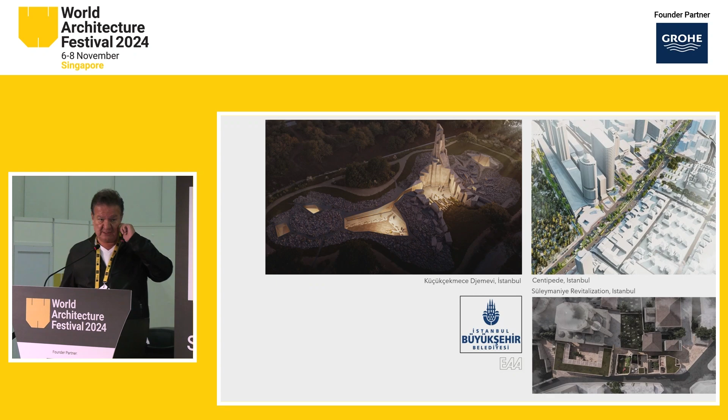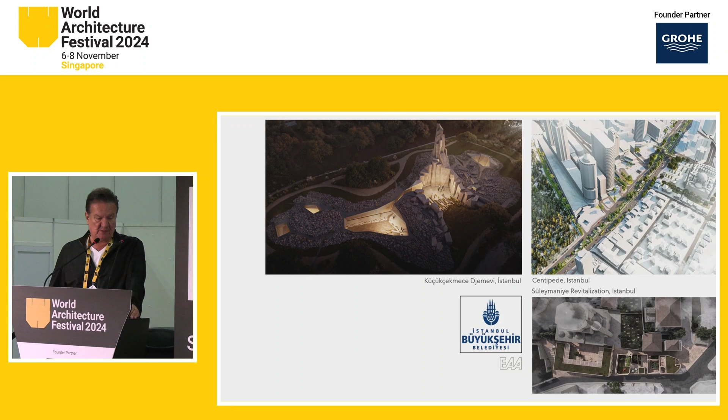This is one of several projects we are working on with the Istanbul municipality, the greater municipality. Even though these projects don't contribute much financially to the office, I personally give them a different level of priority, because the current mayor of Istanbul places great importance on art and architecture, in a way we're not quite accustomed to.

On the other hand, as an opposition leader, he's working on significant urban projects despite all the problems and obstacles from the central government as well. That's why I believe he should be supported without hesitation.

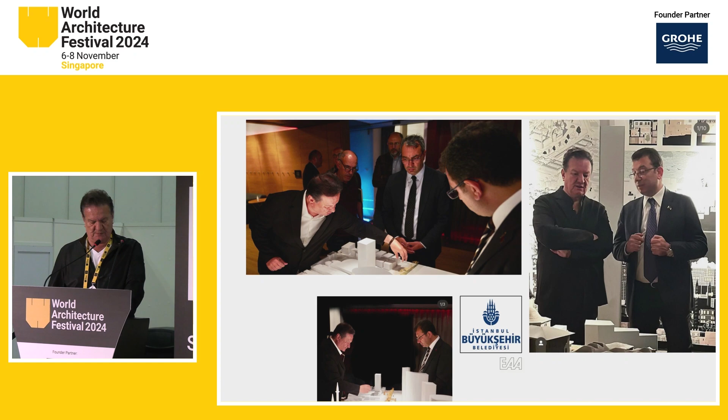When the municipality brought this project to us, the first thing that came to my mind was the Sancaklar Mosque that we designed in Istanbul many years ago, more than 10 years ago. It's for Sunni Islam, not for Alevi. Sunnis are much more in power at the moment, all over the country.

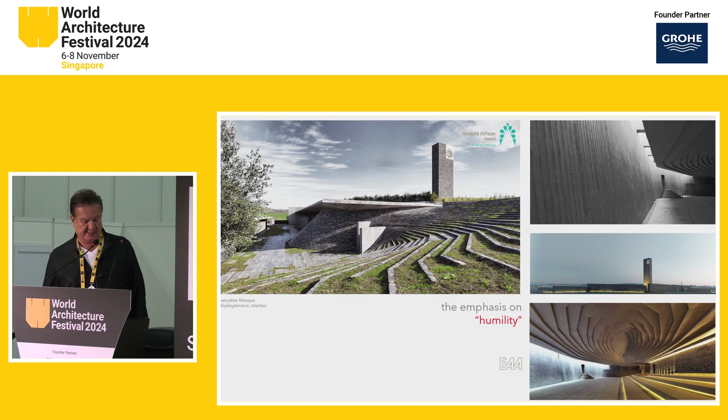I still remember the heated debates we had as the design team during the design process about the crisis in the Islamic world, where the core principles of Islam and its philosophy were somehow being ignored, and how this was affecting architecture in the whole region.

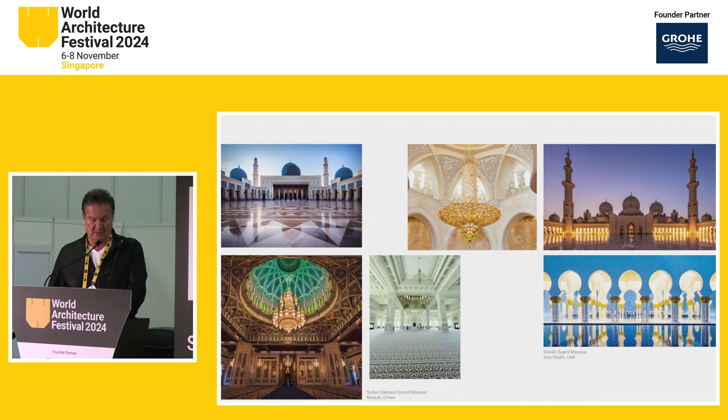We looked at some examples, including Sheikh Zayed Mosque in Abu Dhabi, which is much far away from the idea of humility, a key principle in Islamic philosophy. Or another mosque in Oman, Sultan Qaboos Mosque, where investors or people are somehow proud of millions of dollars spent there, or the largest single piece carpet, or some kind of bombastic chandeliers.

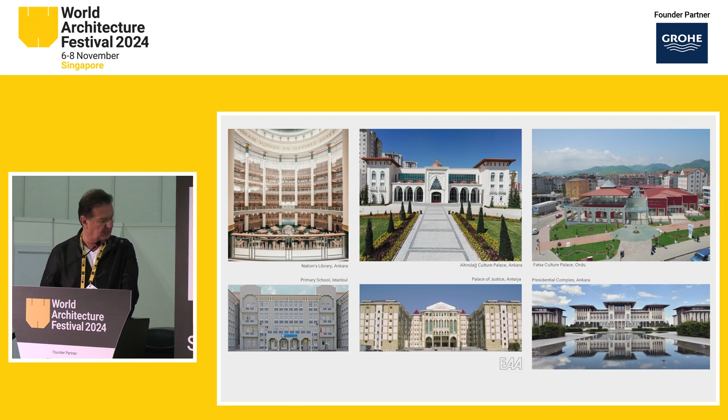I can say the same is valid for Turkey. Over the last 20 years, with the influence of this government, there have been major negative changes in the field of architecture and urbanism all over the country. Lavish and tastelessly designed buildings have spread everywhere, as you can see from the screen. For example, this is the newest landmark project of Istanbul.

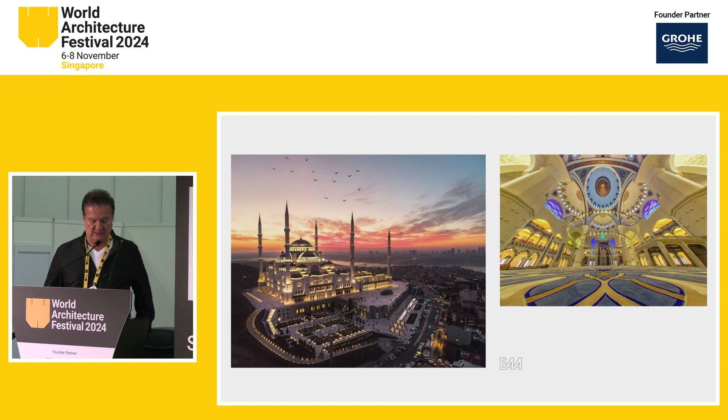In this context, Sunni Islam has become a very dominant force in society day by day. It was kind of inside the politics of this government, and humility or humbleness were degraded, especially in this community, not just in the architectural field but also socially, with the nouveau riche ruling class influence spreading everywhere in the country.

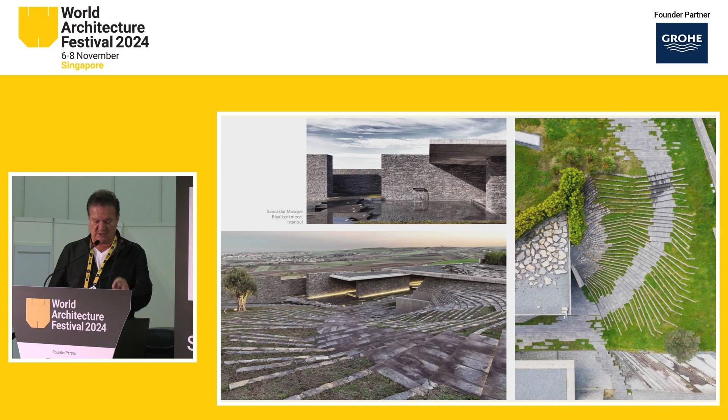This is exactly why the main focus of the Sancaklar Mosque design many years ago was the concept of humility, an approach that blends with its surroundings. But this time, in the case of Cemevi, it needed to be approached in a different way, from a completely different sociological context.

Alevism is one of the sects in Islam, and this complex is going to be a place of worship for the Alevi minority, who have been somehow socially and sociologically oppressed, especially in recent time. Cemevi plays a vital role in their spiritual practices, in their normal life, daily life, safeguarding them for future generations.

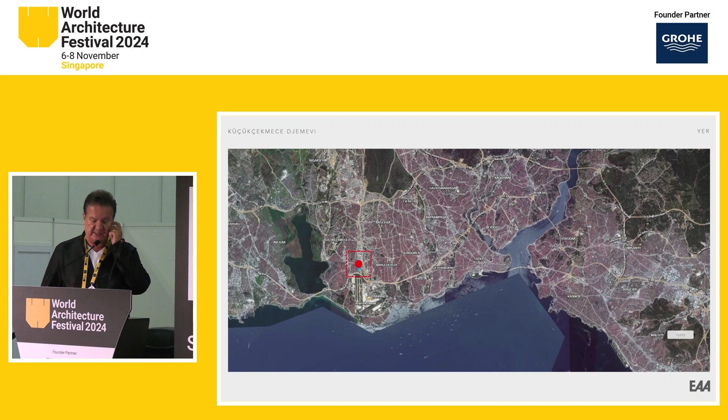The land that the municipality allocated for this building is located at the southern part of Istanbul, very near to the old international airport, so still quite well-known, busy and crowded area. Nearly 10,000 square meters of land is being used as a parking lot for the nearby wedding hall located to the west of the site. You can see it now.

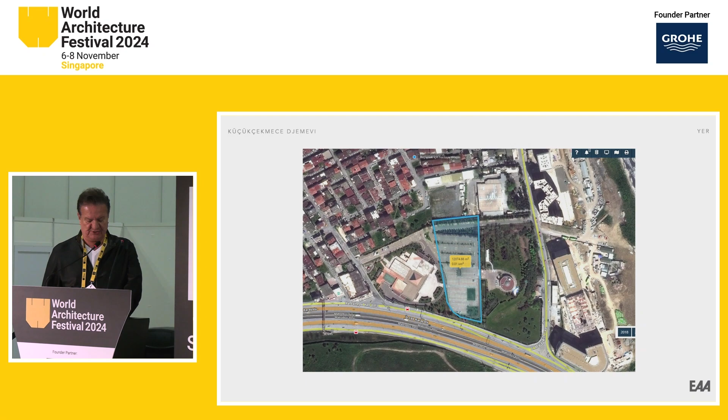To the east, there's a green area that is currently used as a small police station, not open to the public. But from the very beginning of the design process, we always saw it as an important potential for this project. To the north, a highly dense residential and office area is located, and to the south, there's a very busy ring road.

During our closer observations of the land, we saw that the function of parking only comes into play occasionally. Most of the time it's used by local residents, especially in the afternoons when the wedding hall's activities slow down. People would gather there to walk or sit under very few trees for some shade and conversation. This gave us a different inspiration for the space.

This is the land. When we looked at the dense housing and new offices around the area, we realized there was no public space at all. The land and the adjacent police station area, when combined, form an area of approximately 35,000 square meters.

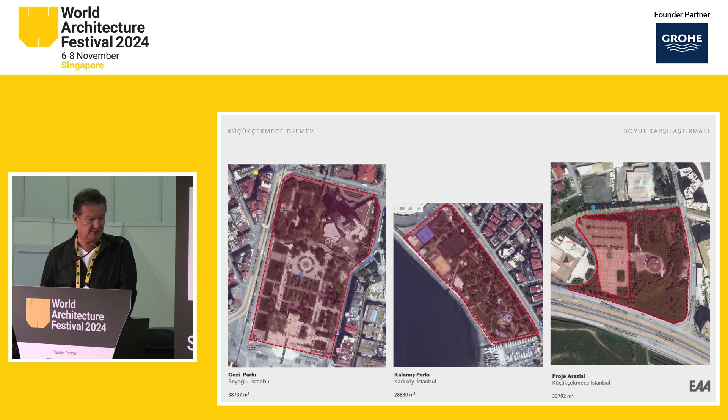This is actually very close to the size of some well-known and heavily used parks located in different areas in town. On the other hand, this area is easily accessible from both the ring road and other nearby roads.

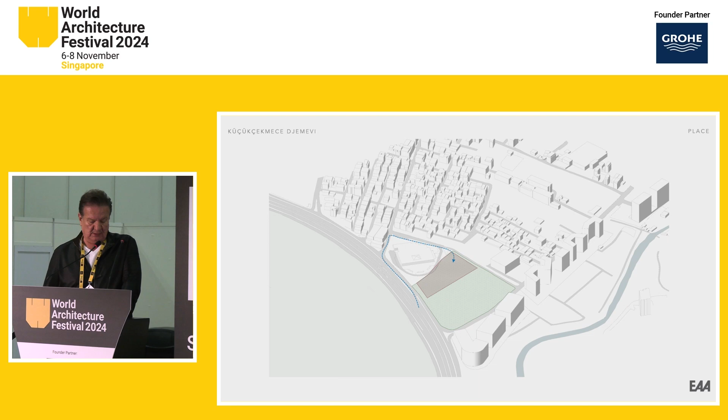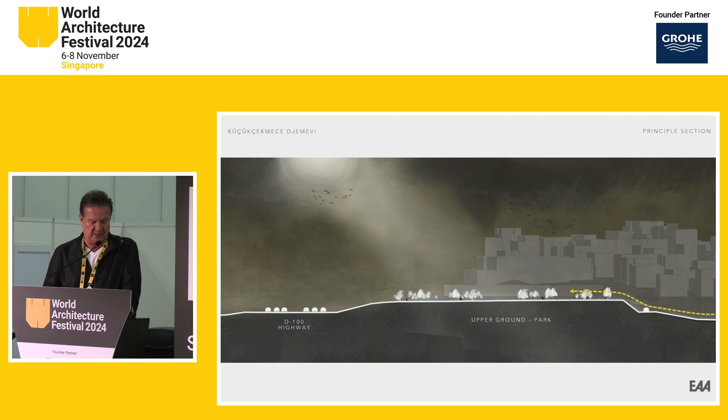In the section diagram, we can see that the site is somehow a kind of hill for the moment, elevated above the two roads, being used as a parking lot. However, it has the potential to be transformed into a very well-designed park, which would be a great asset for this area, easily accessible for all the locals.

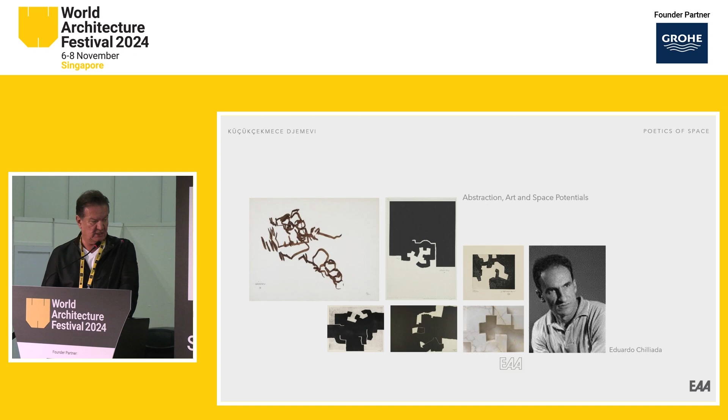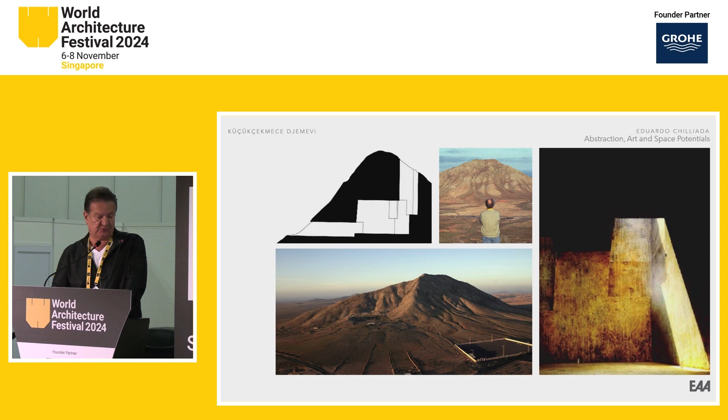While we were thinking about these ideas, we were envisioning Eduardo Chillida's work, where he brilliantly addresses the issues of art, space, abstraction, and soul. He mentions that with its abstract existence, the space he created in Mount Tindaya is a kind of statue of tolerance for people of all colors and races, and inside, no one is different from another. That was a big inspiration for us.

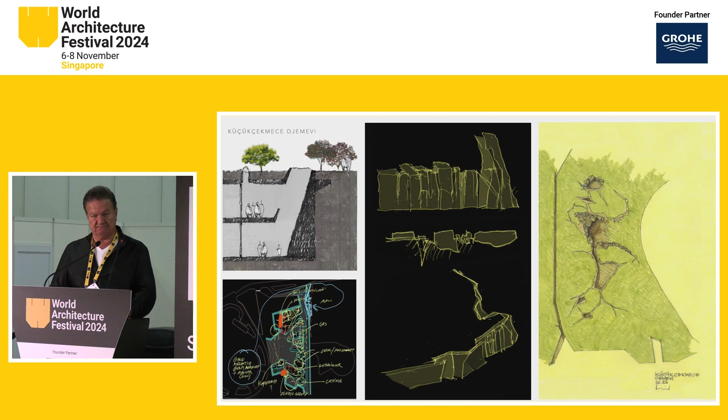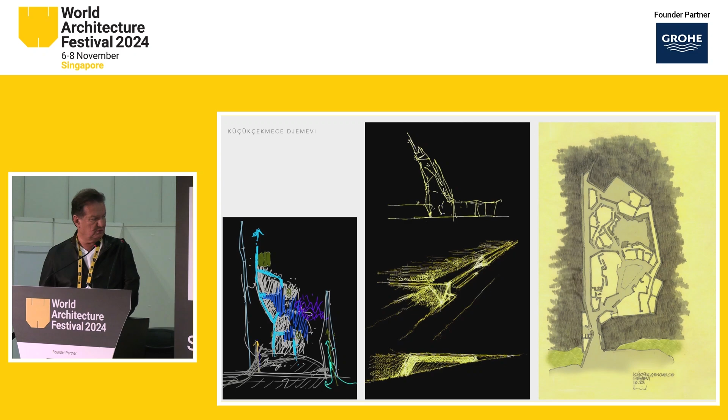These are some of our first sketches. The idea of breaking away from the essence of Islam was not an option at all. However, I had this feeling that a sense of monumentality, together with dignity and calm, needed to be present in this place of worship. At first glance, these might seem like conflicting terms and ideas, but as the design team, we wondered if these elements could actually complement each other in this specific project.

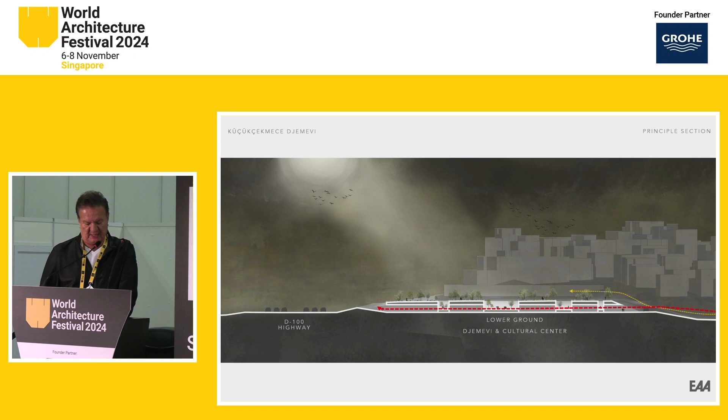In addition to the idea of transforming the upper ground into a public park, we decided to place Djemevi functions under it, at a level where they can be accessed directly from the dense residential area, and organize them around several courtyards. Each one will serve a different function and reflect various rituals and activities of worship and daily life.

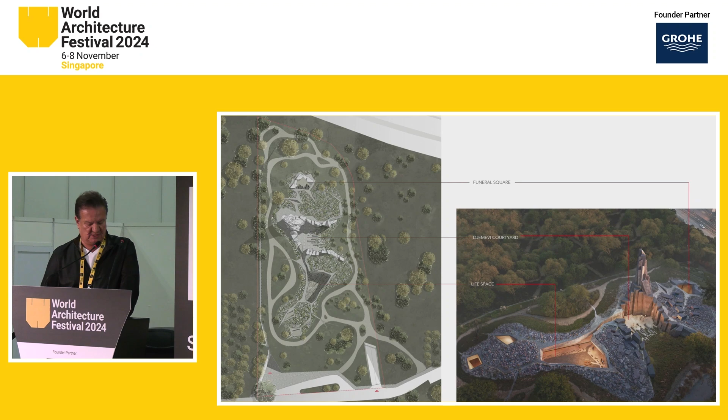This image reflects the connection between the courtyards, the park, and the main room, the main Djemevi courtyard. A night view.

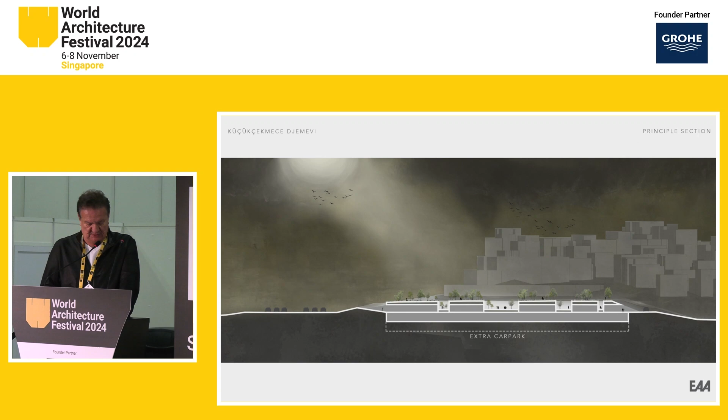Some car park spaces, one or two floors, together with the service areas, will be positioned under the main room. These are the plans of the ground floor and the basement level.

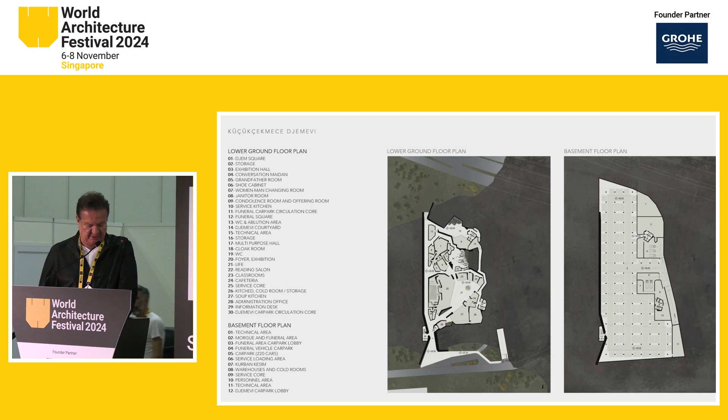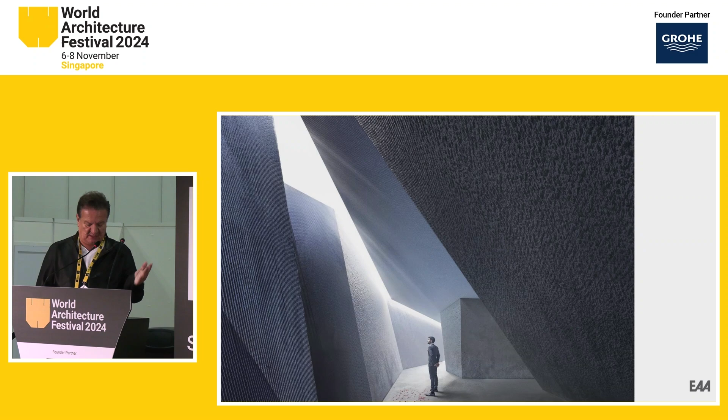You see the fluidity of the arrangement, with the semi-open pedestrian alley connecting all the functions and somehow getting sunlight through a slit. And you see the main section from the main Djem square and connected courtyard.

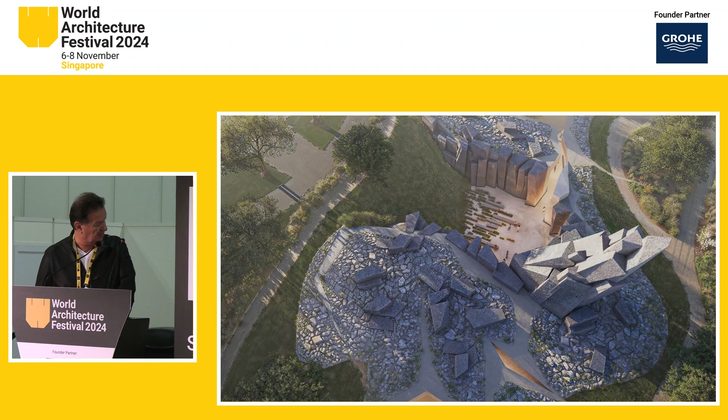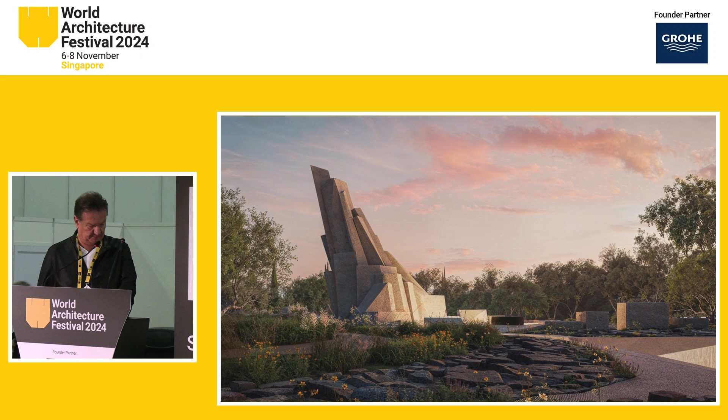The cemevi, the worship area, the main worship area, from inside and outside. This one is from the park level. And the entrance of the semi-open pedestrian alley. One of the courtyards, an element that we somehow interpreted by learning from tradition.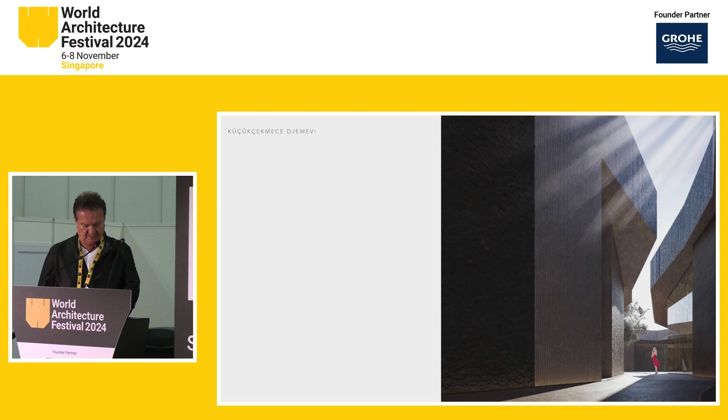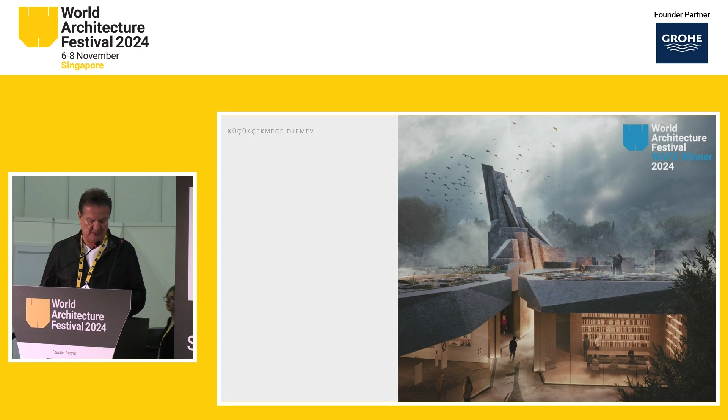I'm very happy to design this kind of building for a community that has been somehow wronged and, let's say, marginalized for years and years, for hundreds of years in the country. This was incredibly exciting for us. Thank you.

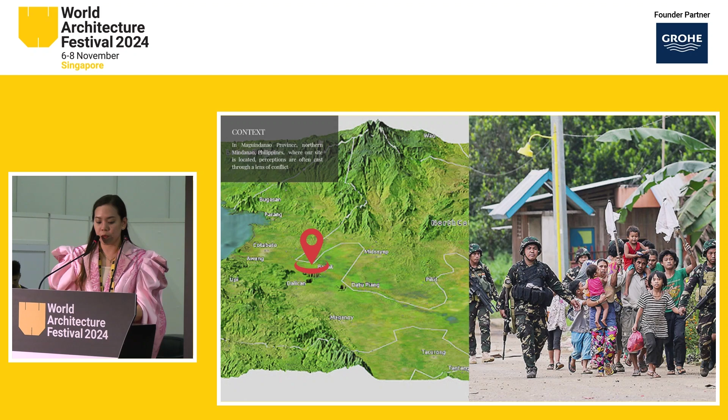This site has a perception that is often cast through the lens of conflict in the Philippines. For international tourists and even fellow Filipinos, Maguindanao may appear as a marked red zone in our maps because it is always perceived as conflict or war or having a violent family feud.

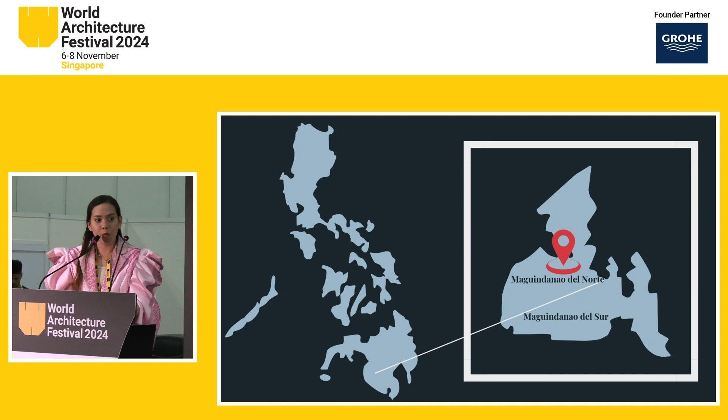Recently, through a momentous plebiscite held in September 2022, Maguindanao province was divided, giving rise to the now Maguindanao del Norte. This division represents not just a change in administrative boundaries, but a pivotal opportunity to forge a province that reflects peace.

Because this is a very new province, there has to be a capital building, and so our work has gladly begun. The location of the site of the new capital building is located in an area where two vital roads converge, one leading to the heart of the province, and the other leading to a bustling agricultural hub, which used to be the seat of rebellion in the area.

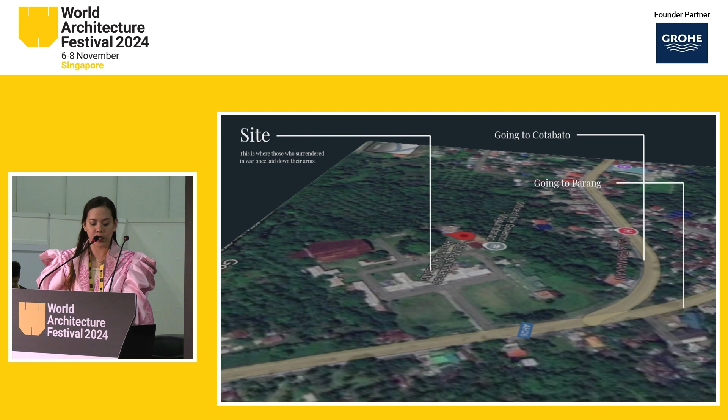The very site of the building also holds significance because this is where those who surrendered in war once laid down their arms. And so we thought the design of the capital must embody the significance of the site, which is hope and regeneration, and it made us look into the values or the principles of peace building.

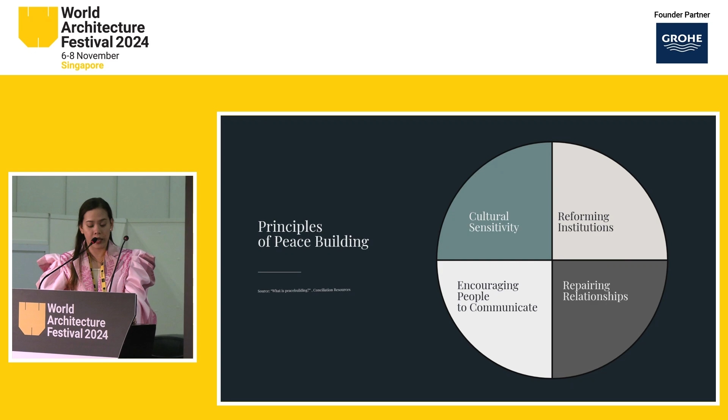Upon academic research with various peace building workers in the region, we found out that peace building has four major principles: imbibing cultural sensitivity, reforming institutions, encouraging people to communicate, and finally, repairing relationships. These principles were the moving force of what would be the design of the new Capitol building.

To imbibe cultural sensitivity, the design has to reflect a symbol that is deeply rooted to the cultural identity of the Maguindanaoan people, especially that of its leaders, because this is where the governor sits.

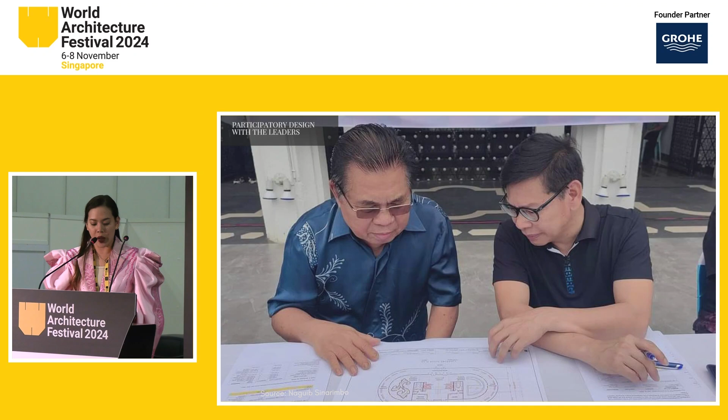We had several symbols in mind, like the foglong string instrument and all the other symbols, but upon a participatory design process, we found out that the most prominent symbol of the Maguindanao leaders is that of the tubao, or a headcloth, worn by the esteemed elders of the community. In fact, when we join parties or any events, you'd see the leaders wearing this specific tubao or headgear. It was then very important that this symbol had to be used in the Capitol design.

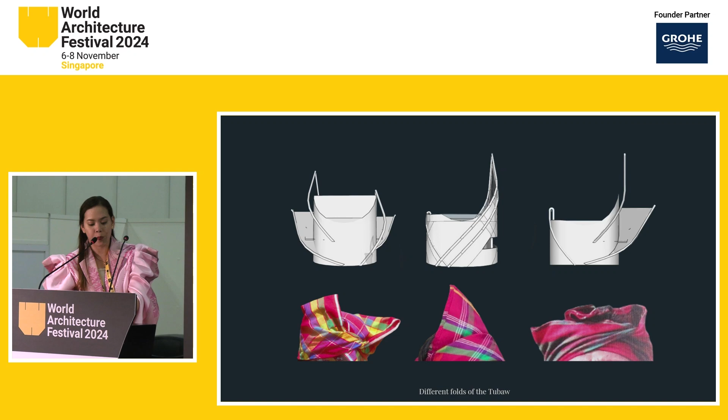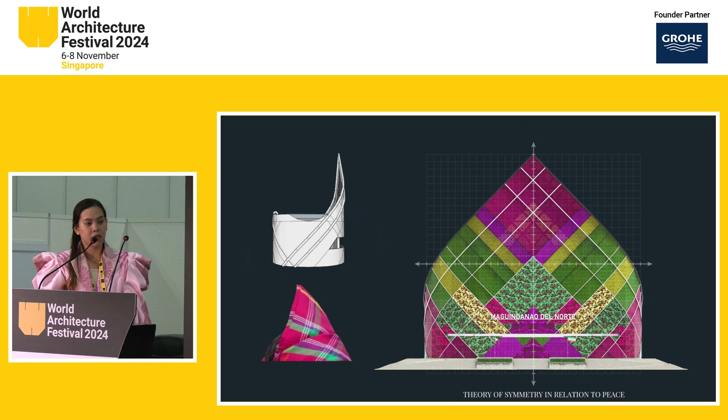But to translate the Tubaw into architecture, we studied its several kinds of folds and analyzed which fold was the most appropriate. First, we analyzed it based on the theory of symmetry and peace. Historically, monuments and important landmarks have often been designed symmetrically with a center axis point because this usually connotes peace. So we decided to use the upright fold because it showed symmetry in design and the center axis, and also showed power, which is what this building is also all about.

The second analysis we did was on sustainability. How do the different folds create a sustainable form that would make a building efficient? The building was facing east, so the amount of sun shading needed had to be at its maximum efficiency. We analyzed the sun path, and we found that the upright fold was the most appropriate.

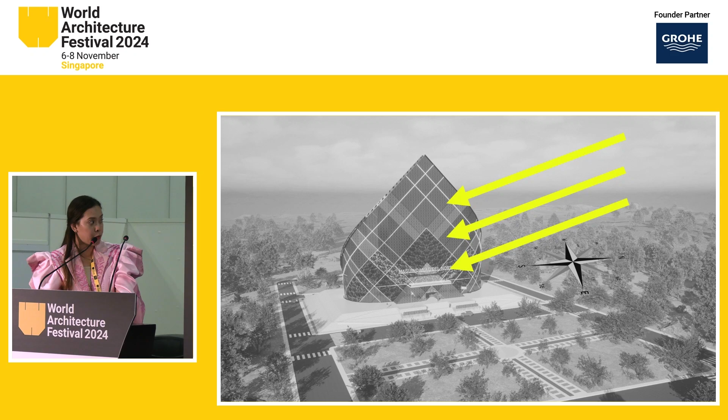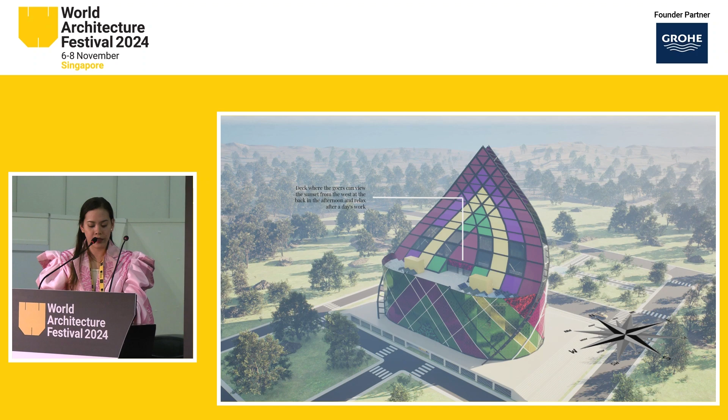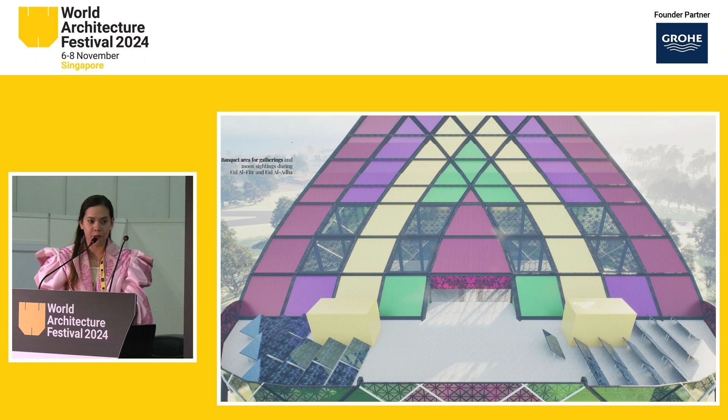This also made it possible to create decks where goers can view the sunset from the west at the back after a day's work to relax. It also enabled us to put banquet areas for moon sightings during Eid al-Adha and Eid al-Fitr, which are very prominent events in Maguindanao culture, because this is composed of 90% Islam, which is a minority in the Philippines, around 10% only.

Just move forward with that.

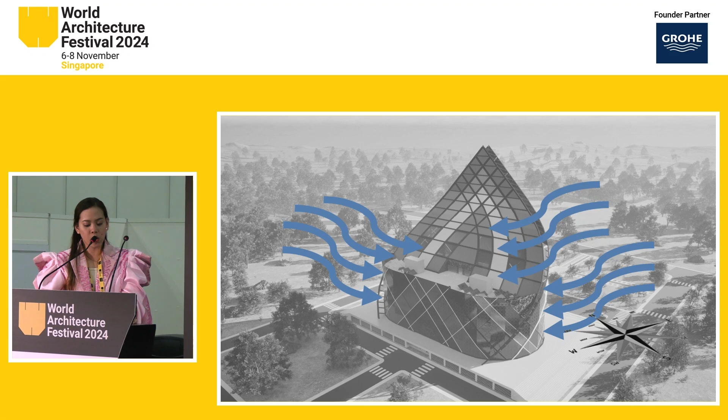The upright fold also showed a cohesive and symmetric form, but enabled fenestrations at the northeast and southwest sides, which is the Habagat and Amihan in the Philippines. This made it possible for breeze to come in and make the entire building cooler. It also allowed for rainwater catchments in areas going to the cistern.

Part of the process of designing was to do an FGD, or a focus group discussion, with the community. One aspect that arose was the fact that they wanted to bring back this industry of carving, called the okir, or the traditional rectilinear and curvilinear plant-based design and folk motifs only found in Mindanao. Adding it to the facade of the building was a must. This would be done by the community themselves to bring back this dying craft.

So we placed it in the front, or the east side, to create a vibrant effect and also a socio-economic benefit to resuscitate love for heritage back to the entire community.

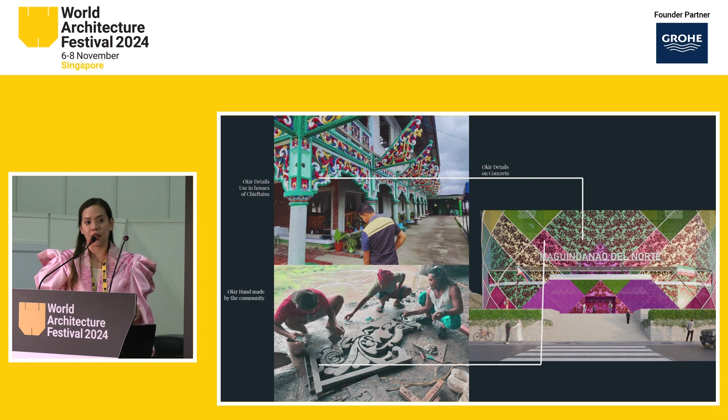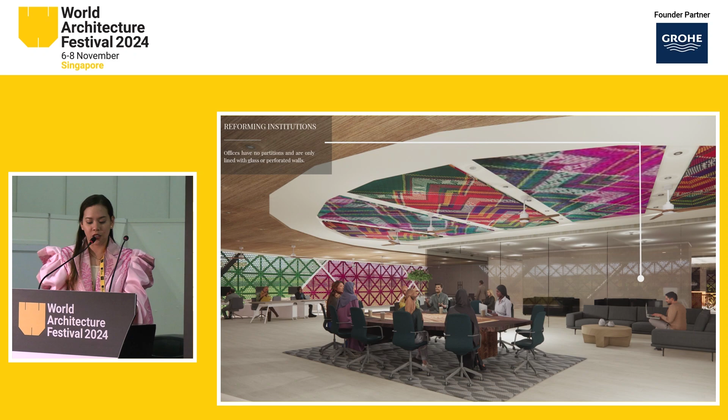Reforming institutions was also a core peace-building principle that profoundly shaped the Capitol's design, so it had to be centered on transparency. The building features glass walls in every office, eliminating traditional barriers and ensuring full visibility in government operations. The open plan layout fosters trust and accountability, allowing citizens to see how decisions are made and policies are crafted, which is very far from the usual government centers in the Philippines.

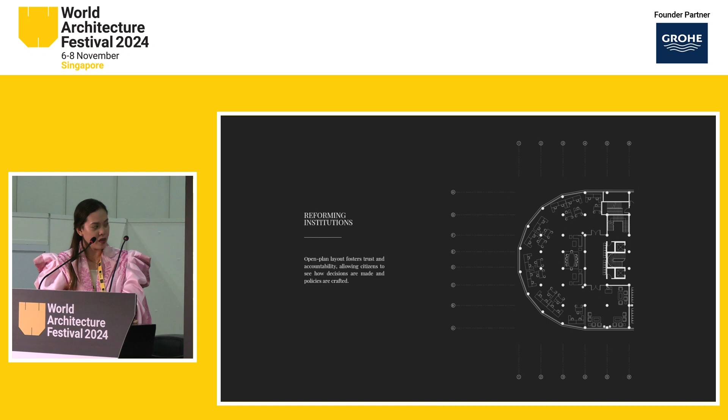Reforming institutions also means that the spaces we create had a good flow, so there's a central core axis to connect each floor. So when the governor goes up, he is seen by his constituents and vice versa, or you'd see who went in late and went out early.

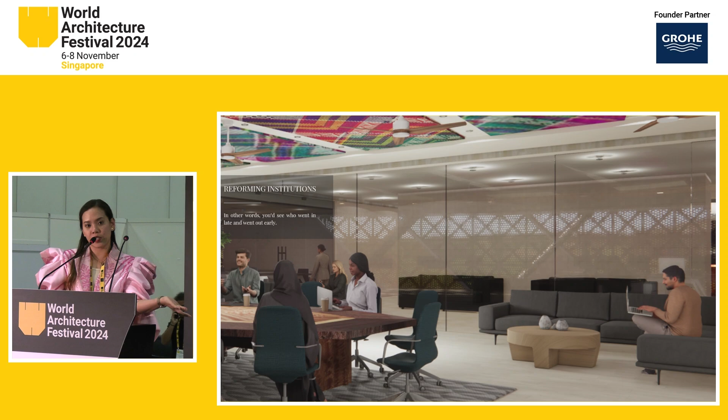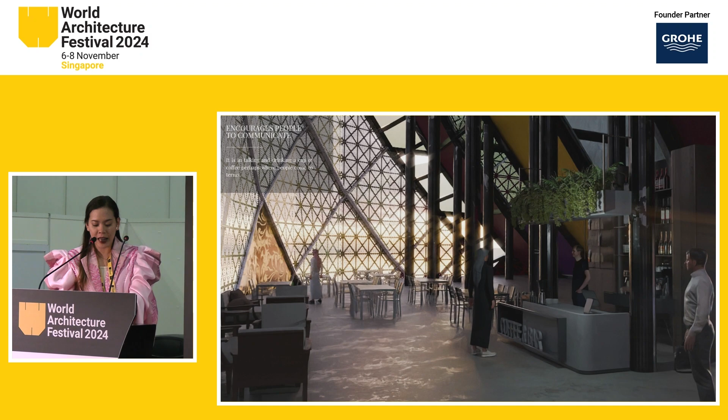Another peace-building principle that we used was on encouraging people to communicate. We believe that it is in talking and drinking a cup of coffee, like these kinds of activities, where people come to terms and communicate. So in designing the building, we created spacious lobbies with vibrant hubs for interaction, placed with open layouts and comfortable seating, so these lobbies could be meaningful spaces for exchange.

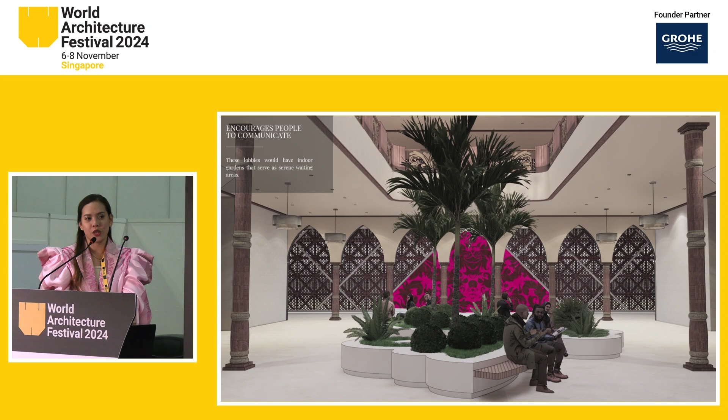These lobbies would have indoor gardens that serve as serene waiting areas because we believe nature has healing properties, and it's very close to their culture because there used to be rebels in the area living in forest areas. We want to encourage people to communicate.

The last peace-building principle that we had to use was to resolve the conflicts, to repair the relationship. That is why the spaces within are deliberately designed for conflict resolution and constructive dialogue.

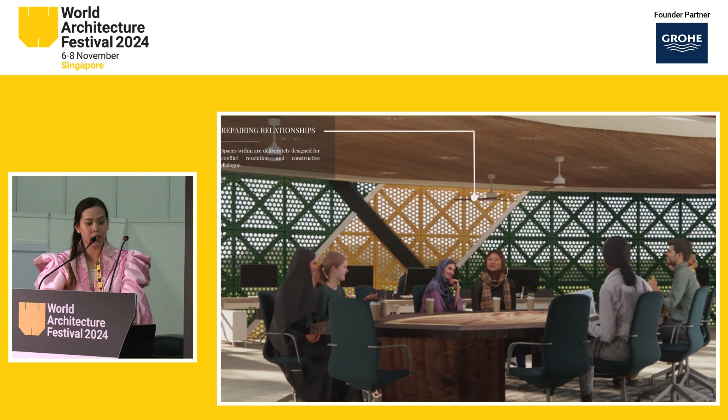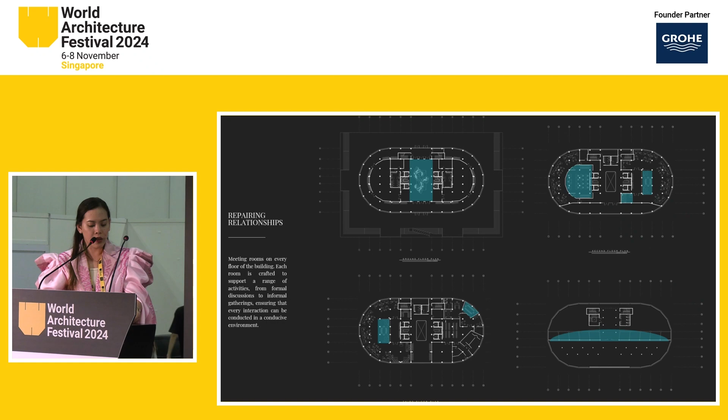By blending the elements, we had a dual purpose for this building: a governance building and a hub for community engagement. We provided meeting rooms in areas of every floor. These rooms are crafted to support a range of activities, from formal discussions to informal gatherings, ensuring that every interaction can be conducive for the environment.

It allows shared heritage with the neighbors and even the interiors of Maguindanao. They're reminders that peace should always be the end goal.

To end my presentation, Maguindanao del Norte Provincial Capitol is not just about architecture. It's also a symbol of hope and resilience of the Maguindanaoan people. It embodies the struggle to opportunity, from division to unity, from conflict to peace, and it reaffirms their commitment to a future where cultural heritage thrives alongside progress.